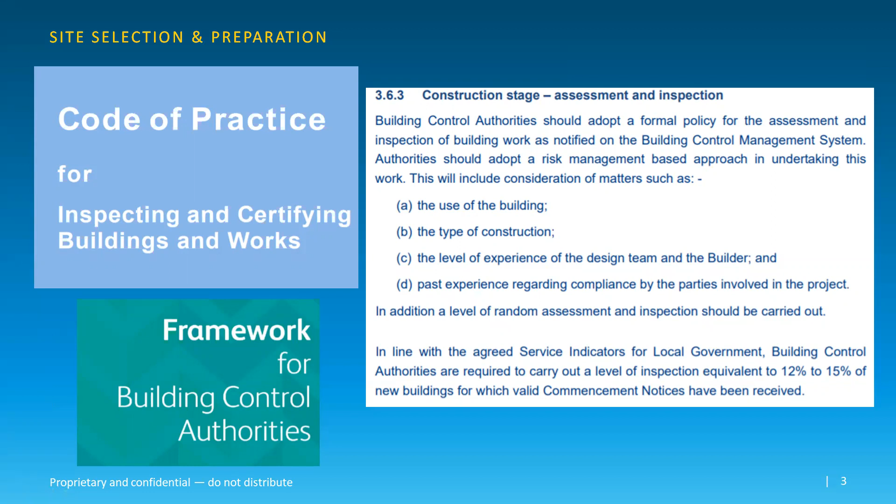I suppose we would also do a geographical spread down here in Waterford, in that a lot of our risk management based approach findings would be in the city, but if we were just to concentrate on those, we would leave out a lot of the smaller towns and villages around the county. We have service indicators with local government, which tell us to carry out between 12 and 15% of inspections on new buildings for which valid commencement notices have been received.

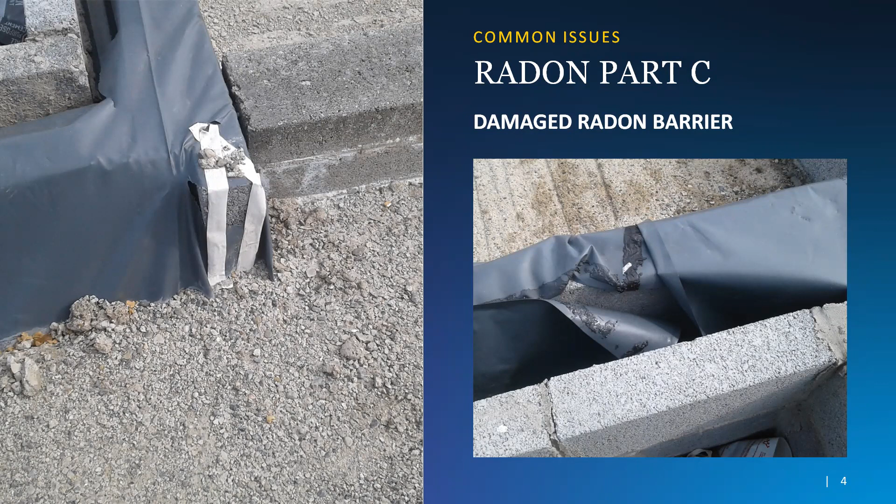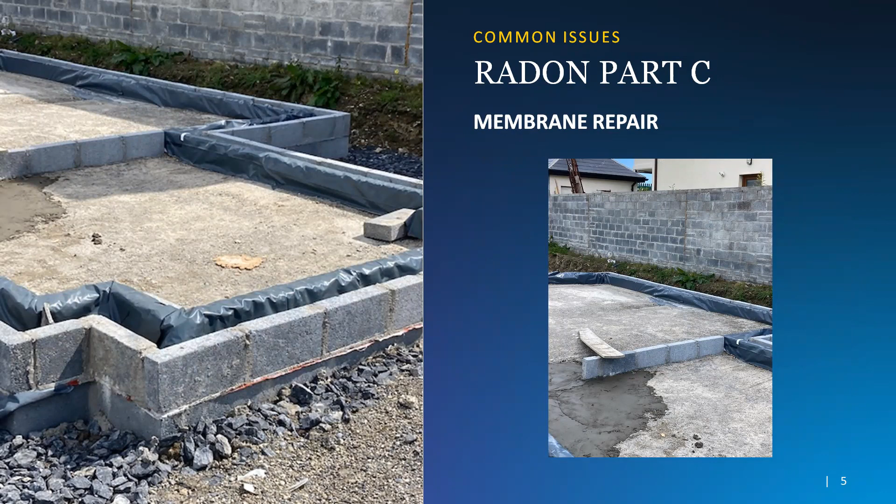So these are some of the common enough kind of issues. This is a radon barrier that's been put in and it's been damaged, and then someone's come along and tried to repair it, but not to any kind of a satisfactory level of repair. So we would take some photographs and send out a Section 11 request letter, and the assigned certifier would come back with another photograph showing us the repairs that have been made there. And that's the kind of detail that we're looking for.

This is a product called XTRATHERM CAVITYTHERM, and it's insulation, and it's got two sides to it. On the inside, it's supposed to be a foil-based side for keeping the heat inside the house, and the outer layer is supposed to be a plastic sheeting that carries the water. If water comes through the outer leaf block, it will run down the plastic and away from the building.

I suppose we go out on site sometimes, and what we see is like the photograph in the middle, where the layers are turned either way, which probably reflects badly then on the product. It probably doesn't work to the standards it's supposed to. And you can see as well, on the foil-based side, that kind of a gap of 15 mil isn't going to do much to retain heat inside the building.

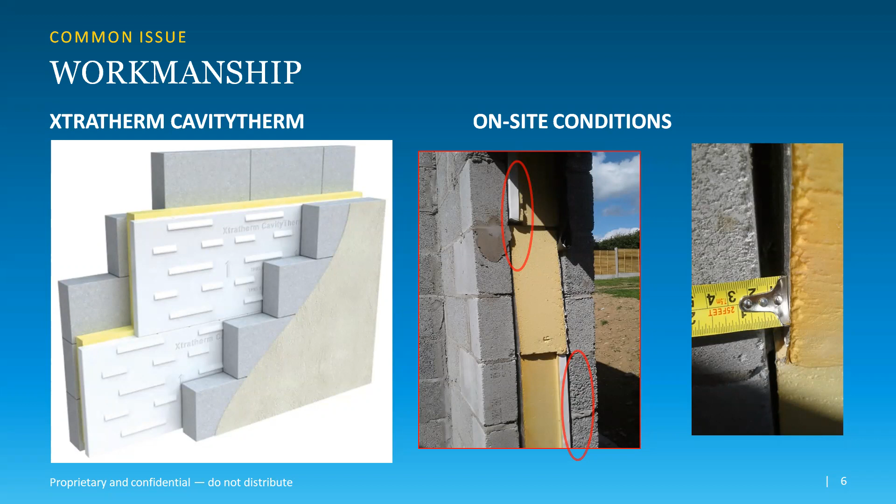This is the one that we still get. It's still common enough, and when you explain it to the homeowner, they're not very happy that the keys were installed. But this is keys in bedroom windows, and it's a Part B problem: if there's an emergency, you shouldn't be fumbling around looking for keys. So again, the picture on the left shows the key in there. The picture on the right shows us a push button assembly.

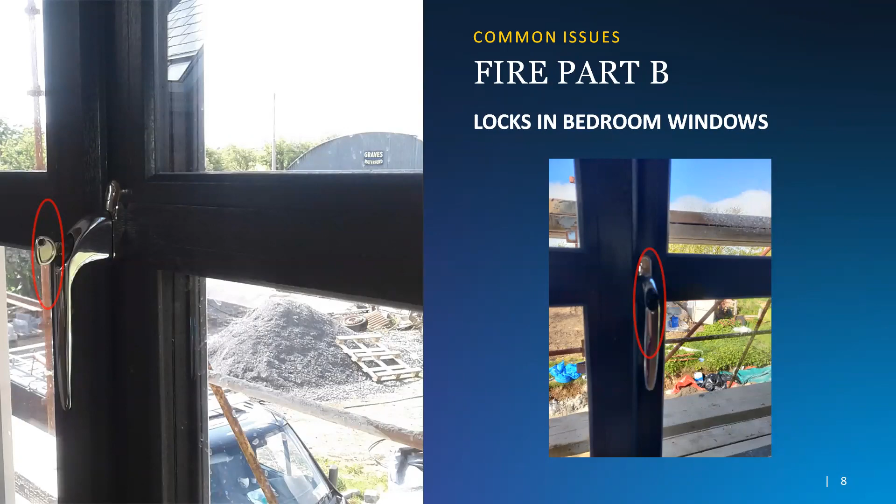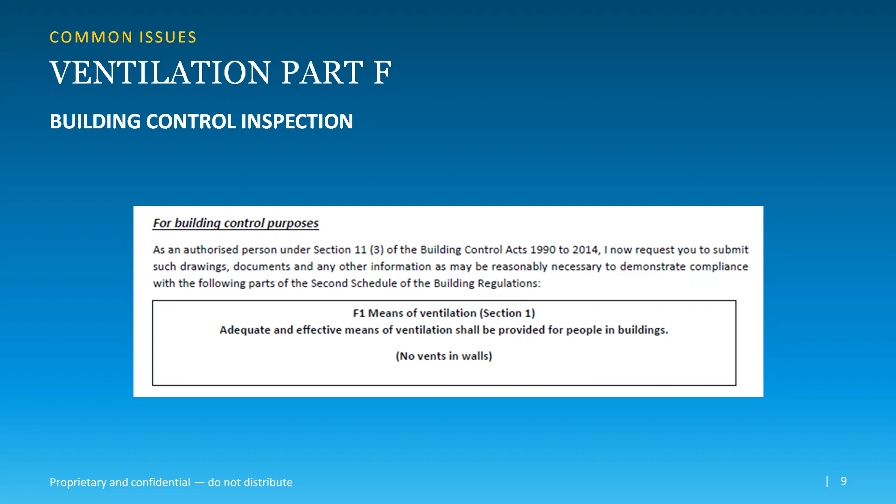Another one that we get a few problems with is ventilation, and this is a Section 11 request letter we sent out. F1 means of ventilation: adequate and effective means of ventilation shall be provided for people in the buildings, because in this particular one there were no vents in the walls. But even sometimes when the vents do go in, there are still issues with it.

The picture on the left here is a housing scheme in Dunmore East, where all the vents were put in all the rooms, but every one of them had been packed in with fiberglass. And the one on the right is, again, the vent was put in, but the stairs was put in over it. So again, on both of these, you would take the pictures, you would send out the Section 11 requests, and the adjustments would be made on both of those housing schemes.

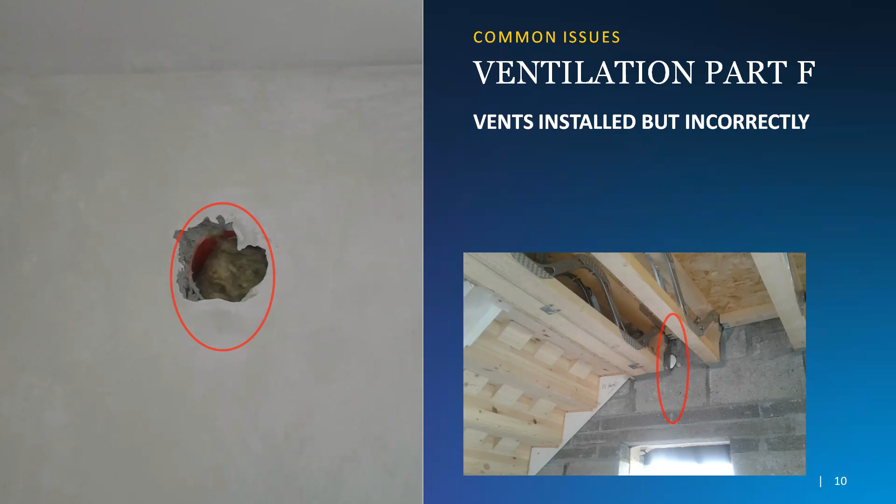This was some complaints, and we don't get many complaints. This is a complaint we would have gotten from a wheelchair advocate in Waterford City, and he would have been pretty adamant that there was a housing estate going up and that it would not comply with Part M. And we'd been on the site of this estate a few times, and we hadn't seen any problems.

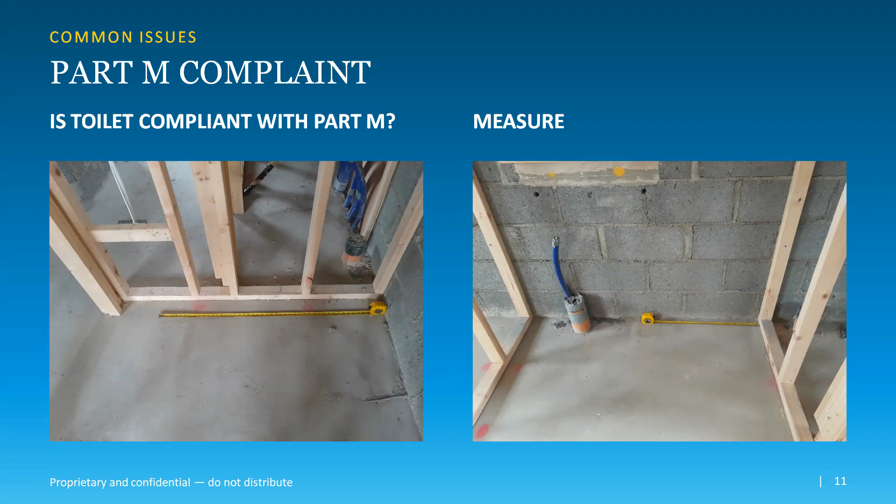So what we did was we marked out the minimum requirement measurements for the house. Took some pictures, and you can see we did the bathrooms, we did the halls, we did the doors, we did the light fitting heights, and we wrote back a report saying that, to our mind, everything that the builder was doing was compliant with Part M, which we sent on then to the person who had made the complaint.

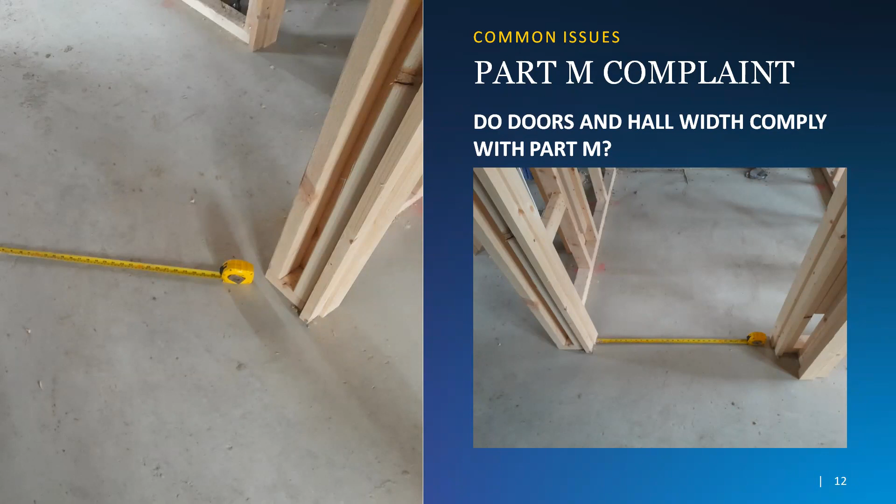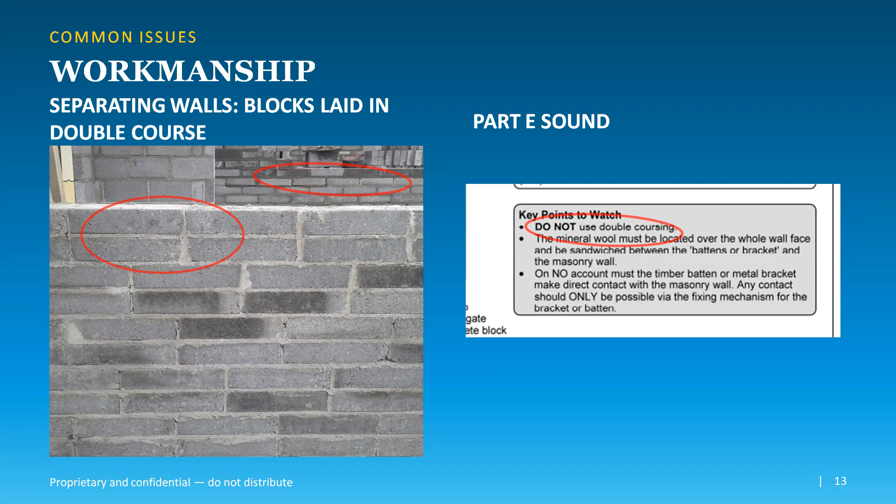This is just some workmanship issues we'd see on site. This is another estate we would have visited fairly regularly, and everything on this site would have been very good. And then we got down one time and everything seemed to have gone wrong there. This is just a few things. Say separating walls for Part E sound. The key point to watch, the first one, is do not use double coursing, and you can see in the red ring on the back, it's all single layer coursing, but on the near one they decided to go double layer coursing.

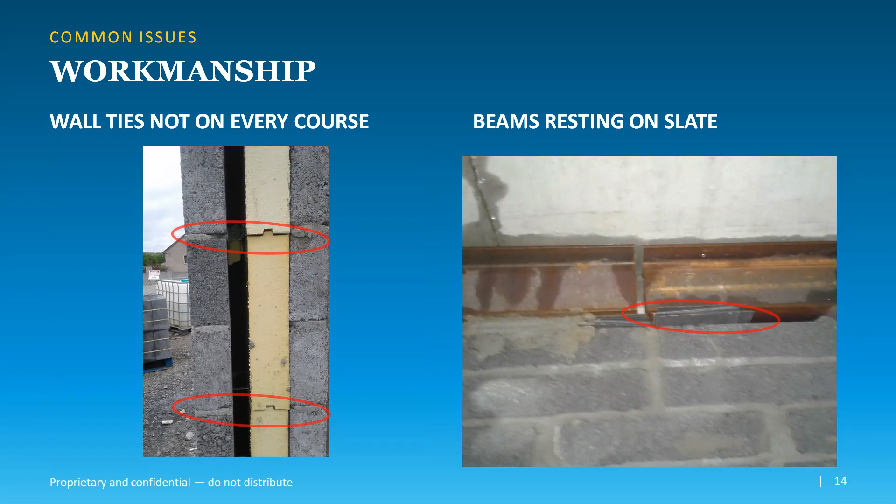Again, all the other ones on this building site had wall ties in at every course of blocks, and on this particular section it was gone to every second one. And then in the picture on the right, we have beams resting on slates, whereas again in the rest of the estate they had all been rested in concrete pads. So whether the block layer had changed or whether the person managing the site had changed, but something had definitely changed there.

And in all fairness, they wrote back to us and they sent us pictures showing that the concrete bearing pads were now in place, that sound tests would be carried out for Part E compliance, and that they were going to address the wall tie spacings.

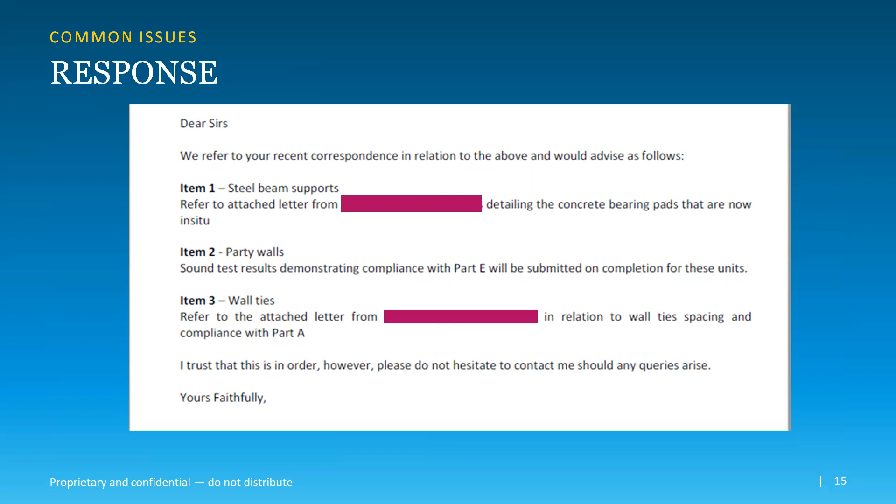But this is another problem we had. It's more when the whole COVID issue was going on at its peak. I suppose people weren't traveling a whole lot, and we were getting in CCCs, but there were no BERs attached to it. And when we contacted the assigned certifier, he said that due to COVID travel restrictions, the BER assessor won't be in a position to carry out final processing of BERs for these houses. But at the same time, we were getting in BERs from this BER assessor for other CCCs.

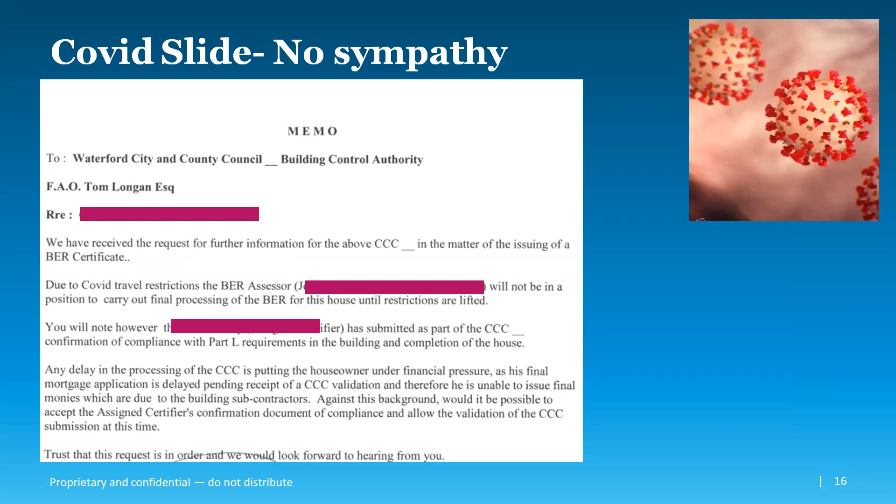So we asked the BER assessor, look, what is the problem here? Why aren't you doing BERs for this particular assigned certifier? And he told us that the assigned certifier had never contacted him to do a BER, that the assigned certifier, I suppose, was maybe just trying to speed things up. He just wasn't going to contact him. So we contacted the assigned certifier and told him that we would not be validating any CCCs without the BERs. And pretty soon after that, we did get the BERs that we needed.

I suppose this is just another observation, some observations then, just about supply of materials, whether it was Brexit or COVID, I'm not sure, maybe a bit of both, but some products seemed to get fairly scarce on building sites, and one of them was insulated board. And so for a while we were going out on site and we were looking at the cavities expecting to see insulated board, and there was nothing in there.

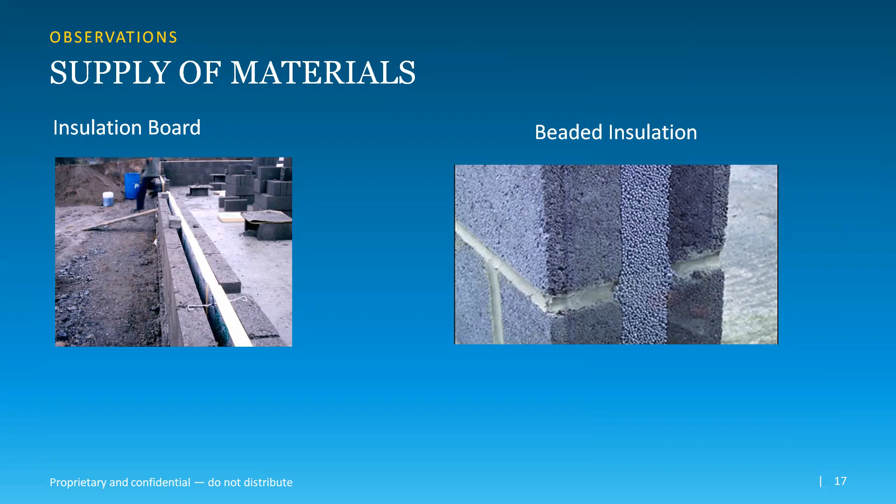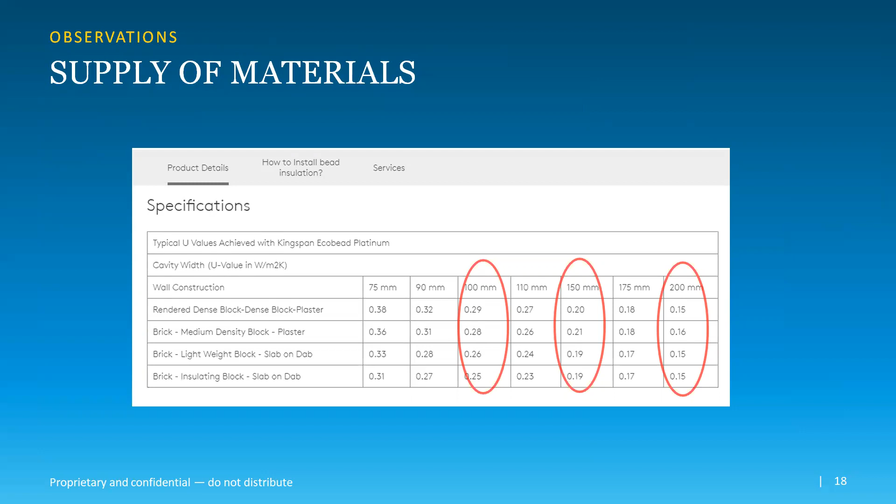And when we spoke to the builder on site, he said, look, we can't get the insulated board. We're going to keep building, keep moving, and we're going to pump in beaded insulation in the end. And that's all fine. But I suppose, depending on the width of the cavity and the U values you're trying to achieve, and the wall ties that you're going to have to use, sometimes you have to pre-plan this. It just can't be a decision made on site, because there are further reaching repercussions when you try to go for a BER, or if your wall ties are incorrect.

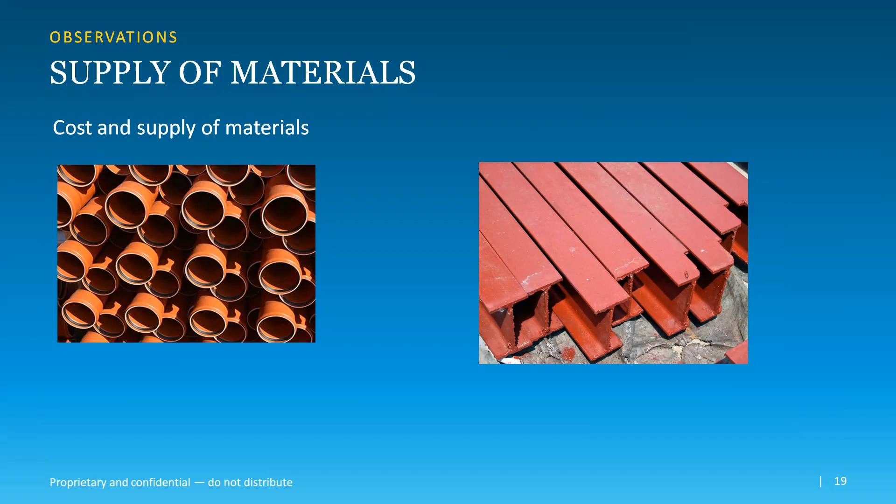And another observation, I suppose, is just the cost of materials. These two products, the piping and the beams, we've been told again by builders that these could have gone up by a third to a half in price. And I suppose the concern is when does this become prohibitive to use the proper materials, and when do builders start to look for a cheaper alternative? Just something to be aware of as much as anything else.

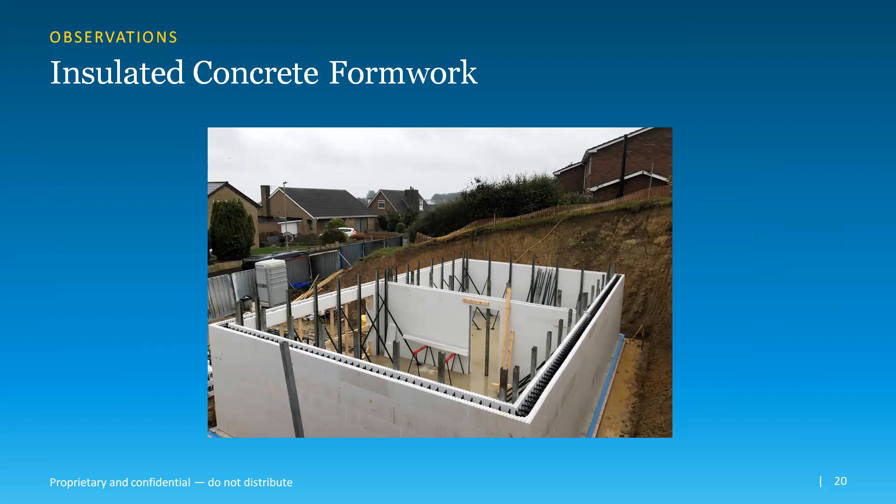Then this is just another little observation we had. For any who don't know it, it's still a relatively new type of construction. It's called insulated concrete formwork, and as opposed to the traditional build where you've got two leaves of concrete block with insulation running up the middle of it, here you've got two leaves of insulation, and there's concrete poured through the center of it to give it its strength and its stability. We were lucky enough, Richard Butler came down and gave us a masterclass of an inspection one day in Waterford, and this is one of the sites we went to.

And when we were out on the site, what we noticed was they were slabbing and plastering to the ceiling level, but up in the attic, it was just the bare insulation. And we had a concern about the surface spread of flame, B2 and B7. So we wrote them a Section 11 request and asked them about the attic space. And they said, as these walls are located in the attic space, the following points are noted. The attic space is not a room or circulation area as described in the regulations. And the non-provision of lining is considered and demonstrated in Figure 5 of the NSAI Agrément Certificate.

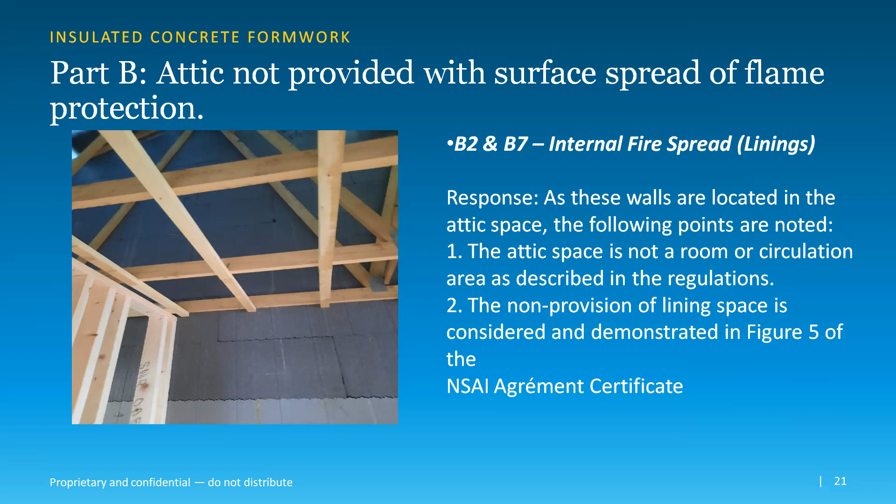And they sent on their Agrément Certificate, and in that, the section on separating walls says that the separating wall consists of the following: 4 millimeters of gypsum skin coat plaster and 12.5 millimeters of plasterboard slabs. And further down, these are acceptable for all areas according to the general provisions of clause 2.1 of section B2. So we went back to them and said, look, in your Agrément cert, it says that this gypsum skin coat plaster and the plasterboard should be the makeup of all of the walls, but you're not doing it in the attic. And again, they came back with: the build-up noted above refers to habitable rooms; while the attic space is accessible, it is not a habitable room.

And that may well be right, but I suppose we just have a slight concern. If one or two of these catch fire, and they haven't done this, what happens then? Is it a case that retrofitting has to come back, builders may be gone, and it may become something that the owner has to try to get through? And we were wondering as well, is the Agrément cert right, or is it something that should be relooked, or maybe they should continue that build-up all the way to the attic? But I think Richard has done some more work on this as well.